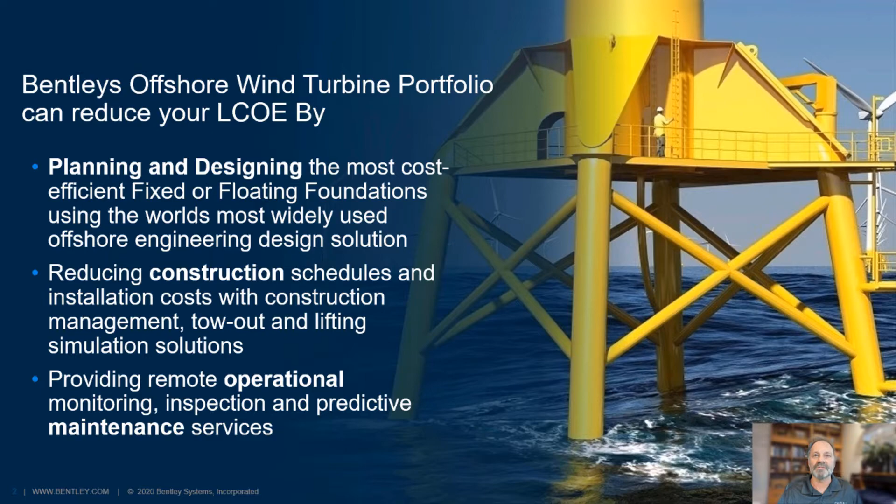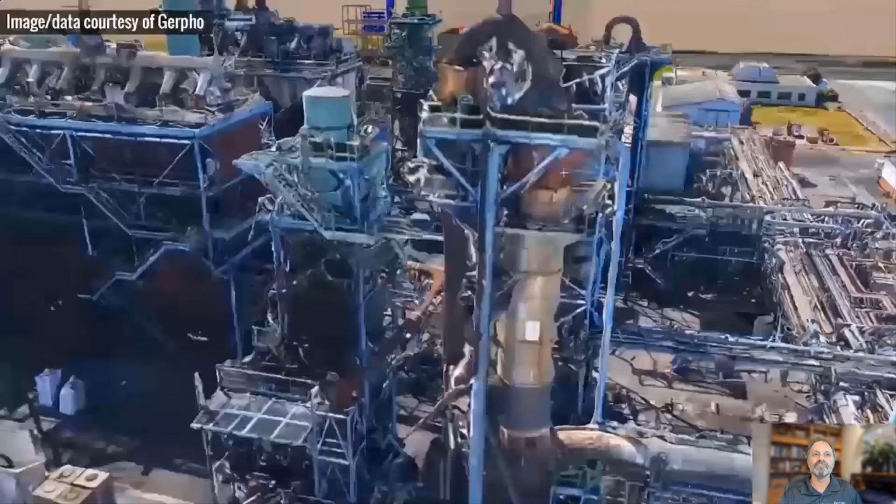So let's hear what is a digital twin. A digital twin is a digital representation of a physical asset, process, or system, as well as the engineering information that allows us to understand it, model it, and get its performance. Typically, digital twins can be synchronized from multiple sources, including sensors and continuous surveying, to represent its near real-time status. This synchronized data can be used to gain valuable insights, to more fully understand the physical asset.

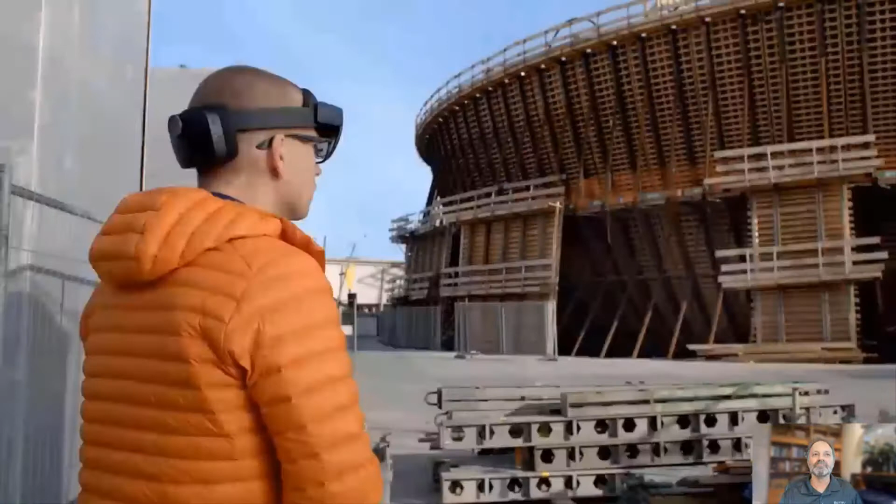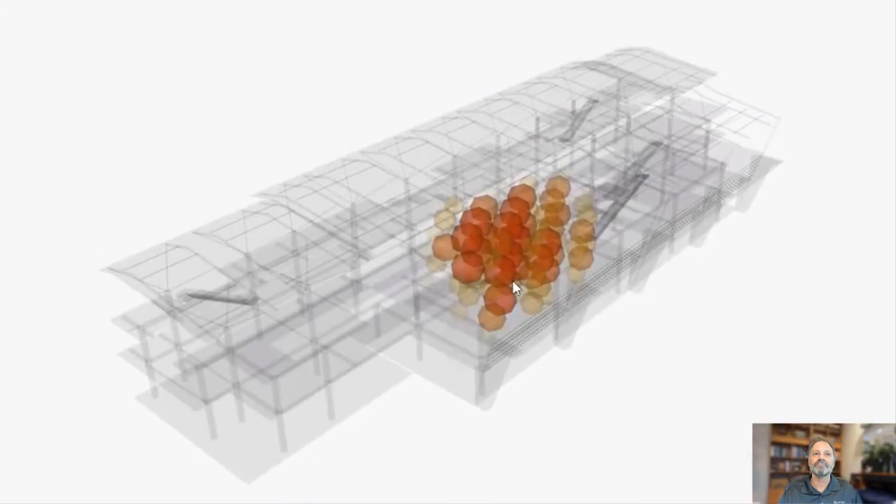Infrastructure digital twins, or iTwins, are emerging now because of a convergence of technologies that enable an immersive and holistic view of infrastructure. Now, these include 3D and 4D visualization, reality modeling, mixed reality, and geotechnical engineering. Bentley's goal is to enable a digital twin ecosystem that will improve our understanding and transform the performance of the world's infrastructure.

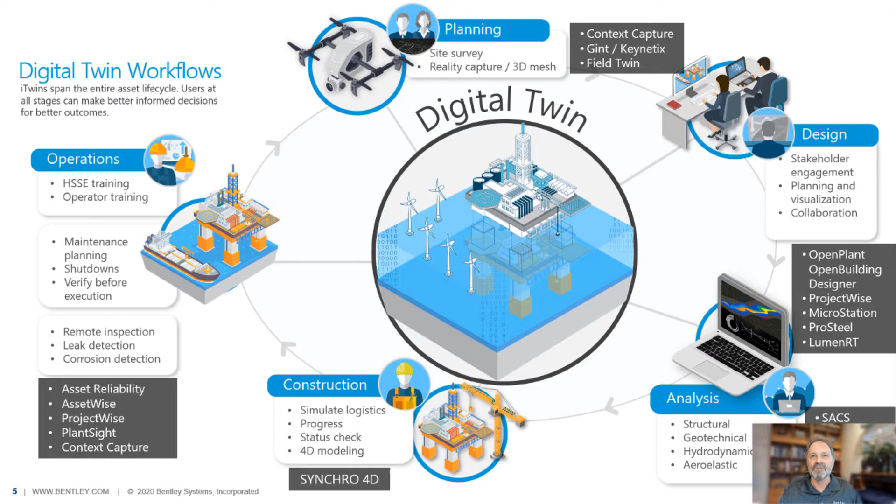And a digital twin for offshore wind farms should be comprehensive across the whole complete life cycle, as I mentioned, from planning to design to engineering analysis to construction simulation through to operations and maintenance, and even with asset performance and maintenance. So let's look at the planning phase.

Let's look at a unique tool called FieldAP and FieldTwin from Bentley's partner FutureOn. As an offshore wind planner, they typically want to combine the metocean data with the seabed depth profiles, the geotechnical soil conditions, and the various turbine equipment options. So different wind farm layouts can quickly compute suitable foundation sizes and project costs. And when the project moves from detailed planning, procurement, and construction phase, the field twin data can be connected to the Bentley iTwin platform. So let's look at this in action.

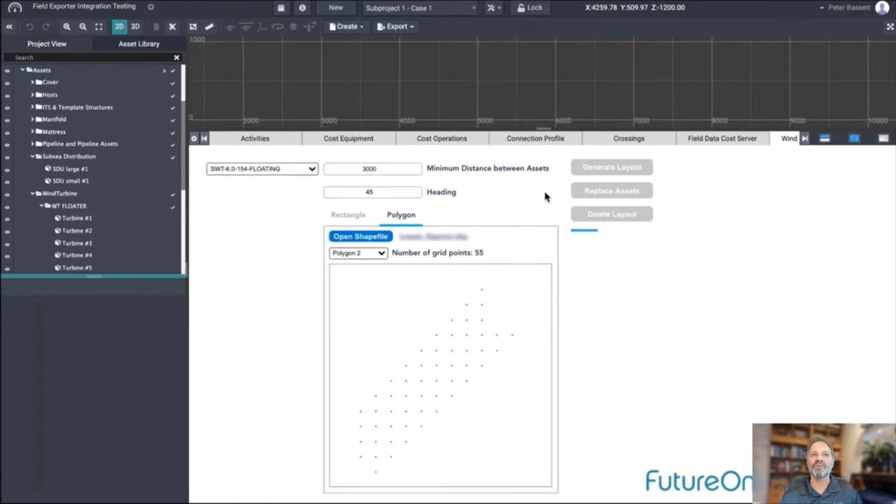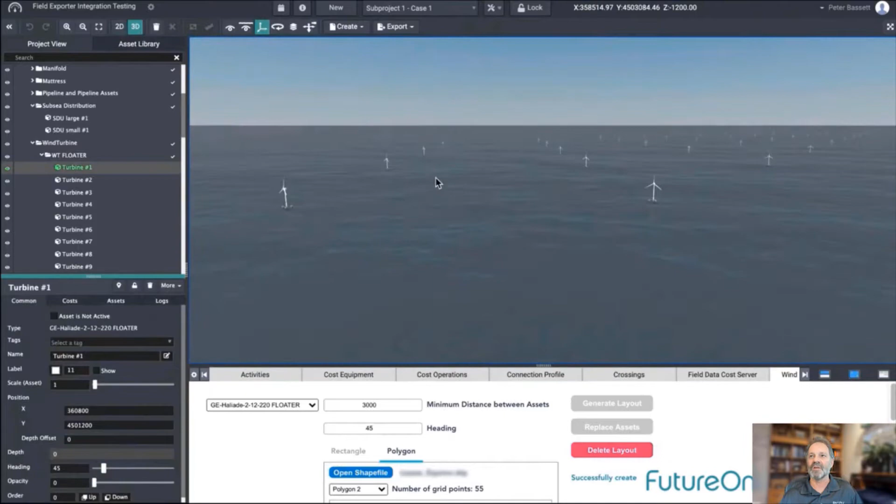FutureOn's FieldTwin Platform as a Service provides engineering and field staff a way to aggregate and visualize all the data critical to offshore wind projects. The proposed layouts can automatically be generated within the 3D model of the seabed depth profile for a clearer visual evaluation by developers and stakeholders. It is easy to design and compare various substation, turbine configurations, and cable routing, and the costs associated with each configuration, including accounting for existing assets like oil and gas drilling platforms which may be in the area.

So next is design. So how can we lower your design cost? Well, Zentech Engineering from South Korea designed this offshore wind turbine substructure. Bentley Offshore design approach enabled the project team to reduce the structural weight while maintaining sufficient structural capacity and strength given the wind and wave loading on it. The construction of the optimal design took 20% less time with Bentley's SACS application.

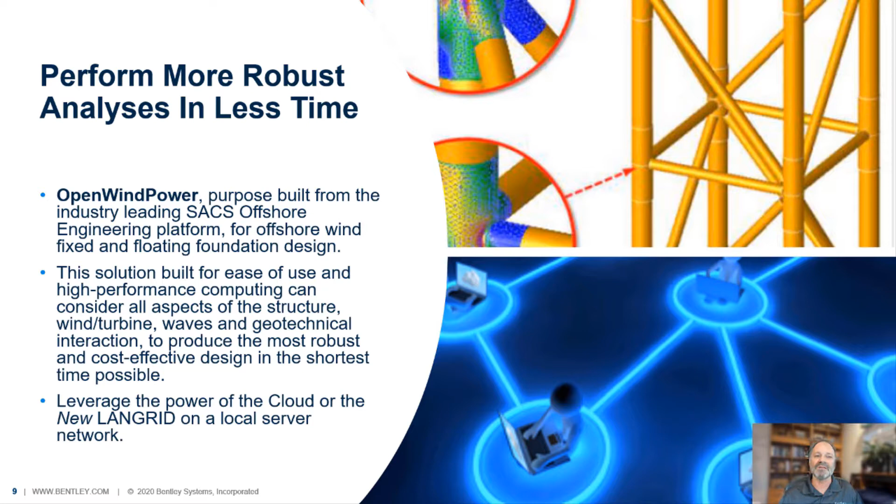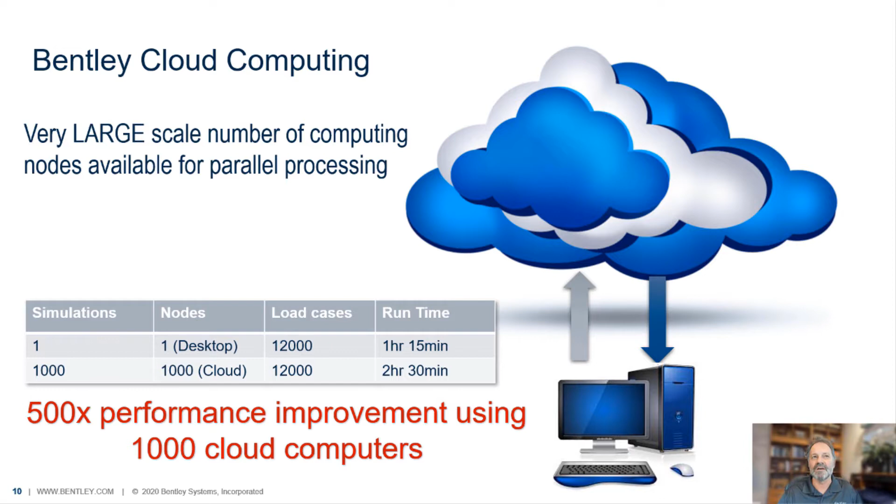And these high-performance computing options are available like cloud computing, and they allow for large-scale analysis. So you can explore many more design alternatives and produce a more optimal design. And similarly, we have another high-performance platform using a local area network grid. So let's take a look at some simulations here.

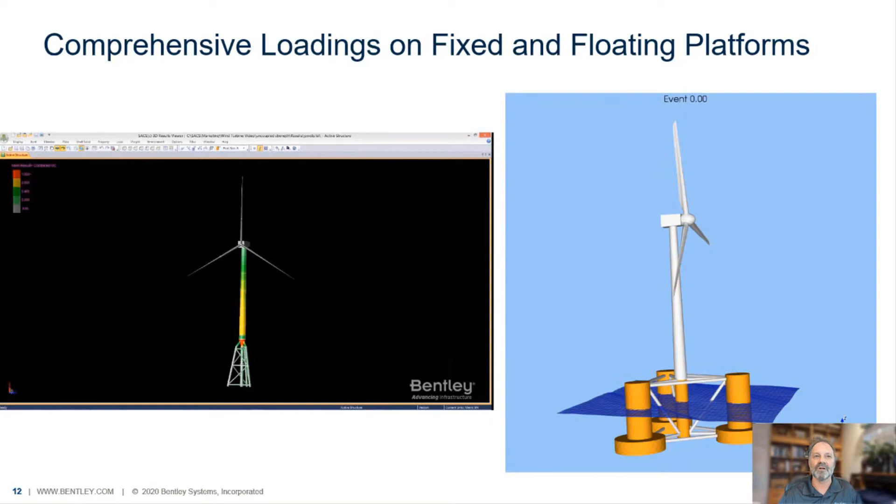So we can integrate coupled and uncoupled aeroelastic analyses and that captures the turbine vibration with the structure and the motion behavior of the fixed or the floating platform to deliver an accurate simulation under even extreme environmental conditions.

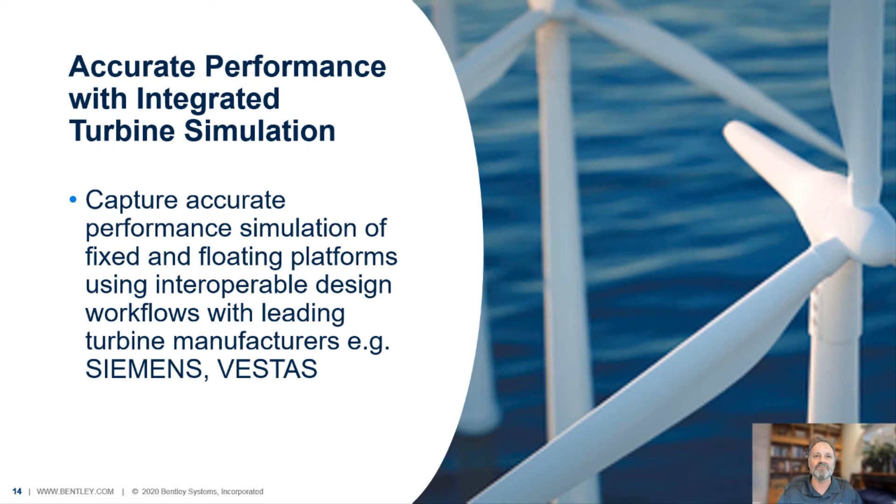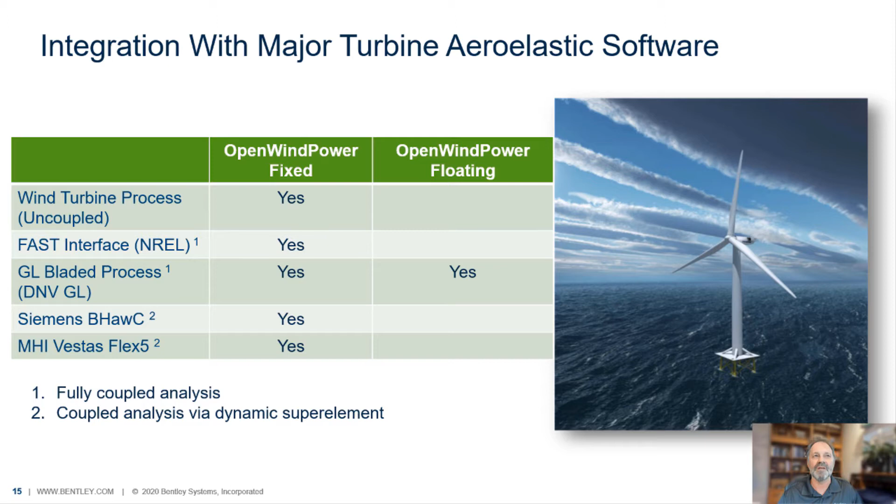But so who are the key wind turbine manufacturers in the offshore business? Well, you can recognize Siemens and MHI Vestas, but we also integrate with GL Bladed, FAST from NREL, and we even have an uncoupled turbine process as well.

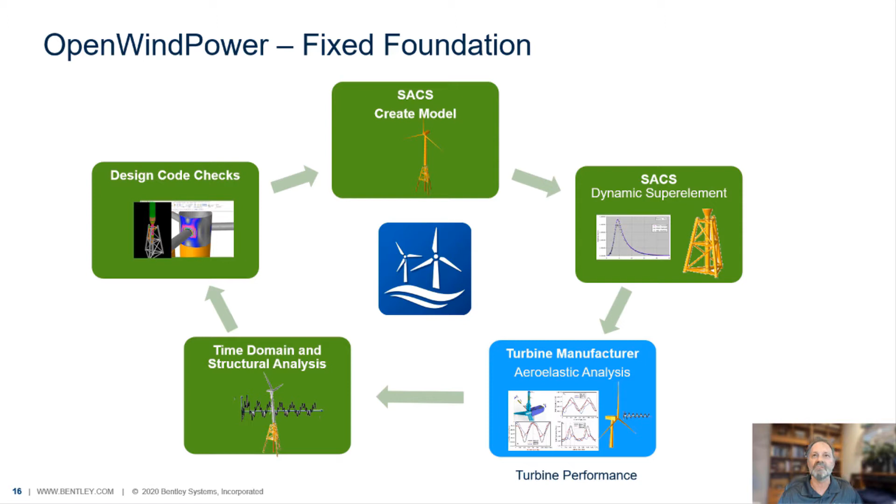We have two products. The first is OpenWindPower Fixed Foundation. It's been around for about 8 years now, and it can analyze and design jackets and monopiles to support those offshore wind turbines. And the second is OpenWindPower floating platform, you'll hear from shortly from Dr. Daniel Veen. And that was introduced end of last year. It's a single product to design end-to-end the floating platform, support those dynamic loadings that you just saw in the earlier animation.

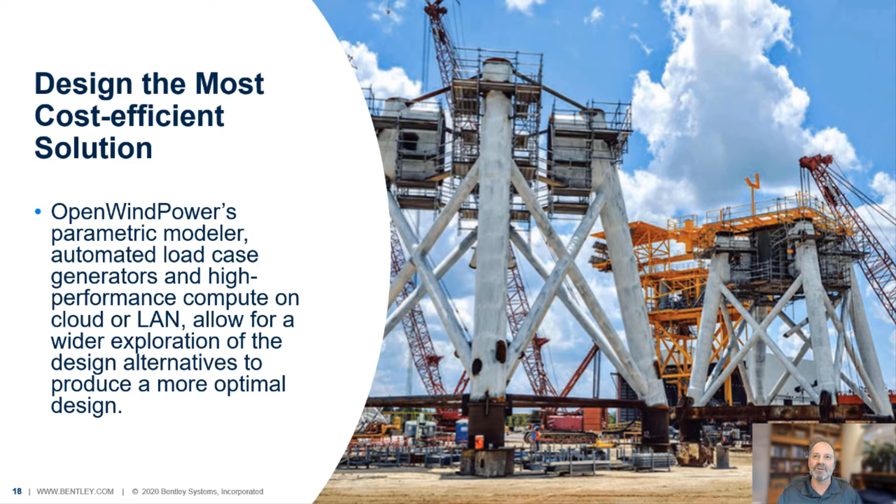Thanks to OpenWindPower, Keystone Engineering out of Louisiana were able to adapt a deep water jacket structure from the oil industry and significantly reduce the amount of steel required. And it resulted actually in an installed cost savings of 20% on the 30 megawatt Block Island project, which is near Rhode Island. They also shortened the design cycle by 50% compared to typical European offshore wind projects. We also are able to handle and manage thousands of load simulations that can be generated in minutes, and we can manage those in Microsoft Excel.

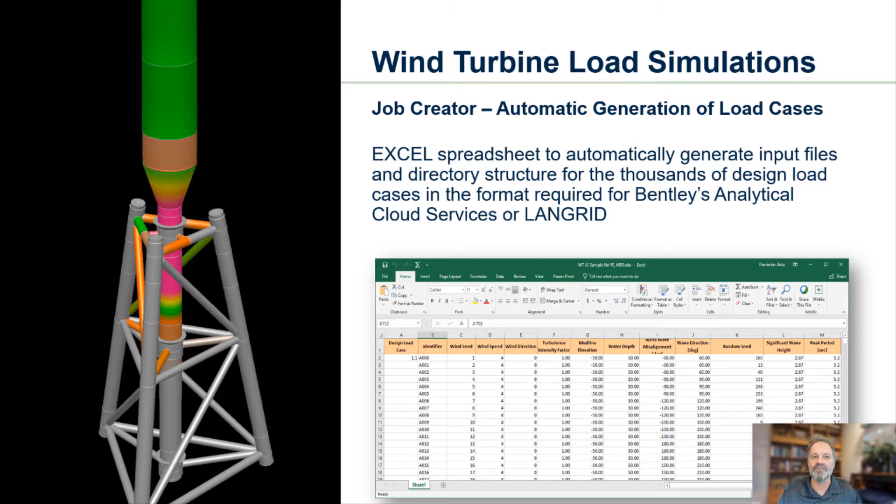Parametric modeling is a big time saver, and particularly modeling jacket structures. Companies like Hyundai Heavy Industry and PowerChina are able to reduce their design time by 20 to 30%. And even batch operations to complete multiple iterations of design and analysis to find the most optimal design solution.

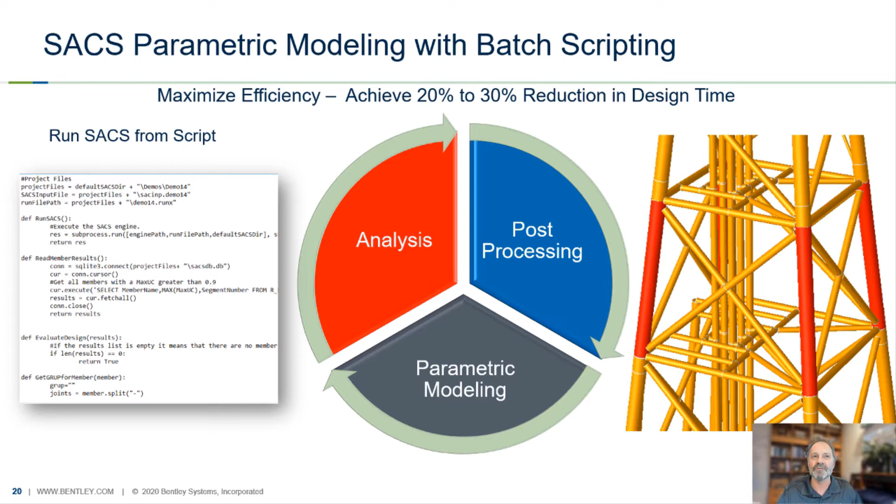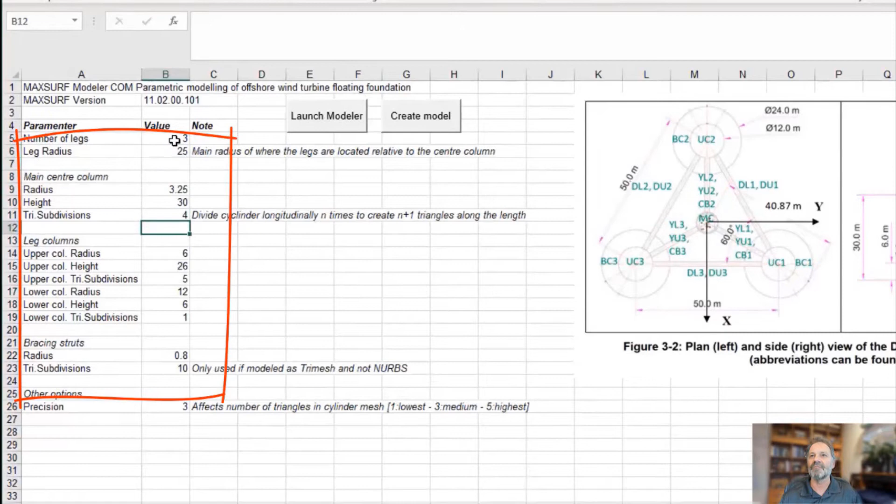So let's take a look at a similar example in our floating platform, OpenWindPower Floating. Here we see parametric modeling using Excel, and just entering a few dimensional parameters, we can very quickly change and generate a full parametric model in seconds for the full semi-submersible cylindrical platform.

For design review collaboration, we have a solution on the cloud using Bentley's iTwin that you saw earlier, and you're able to launch a design review session from inside the software, and any team member can be invited. Offline sessions are also available, and they're available to review, mark up, and share with the whole engineering team or even contractors.

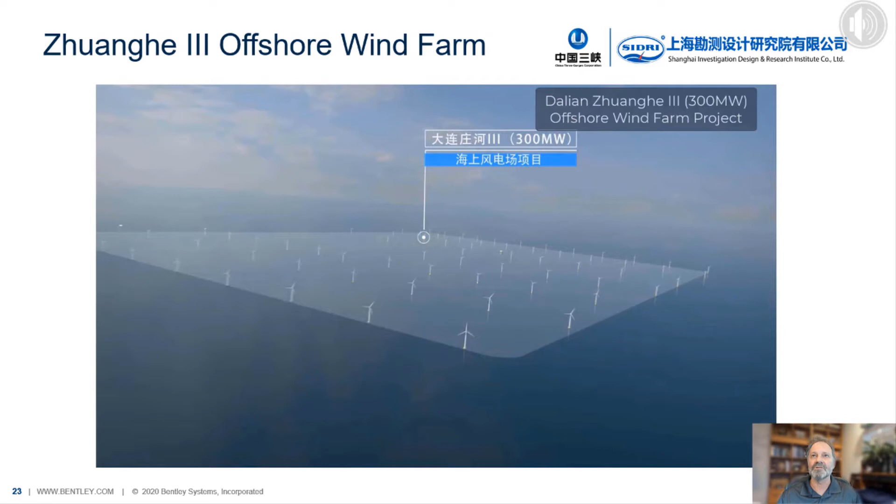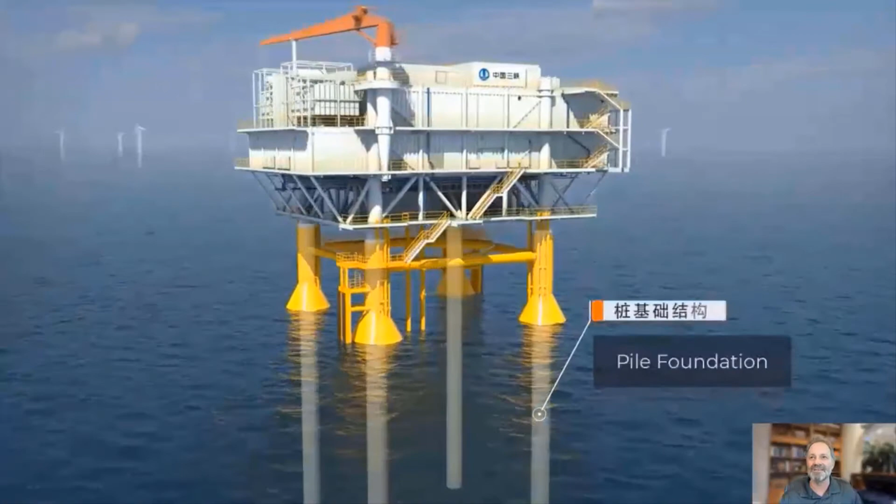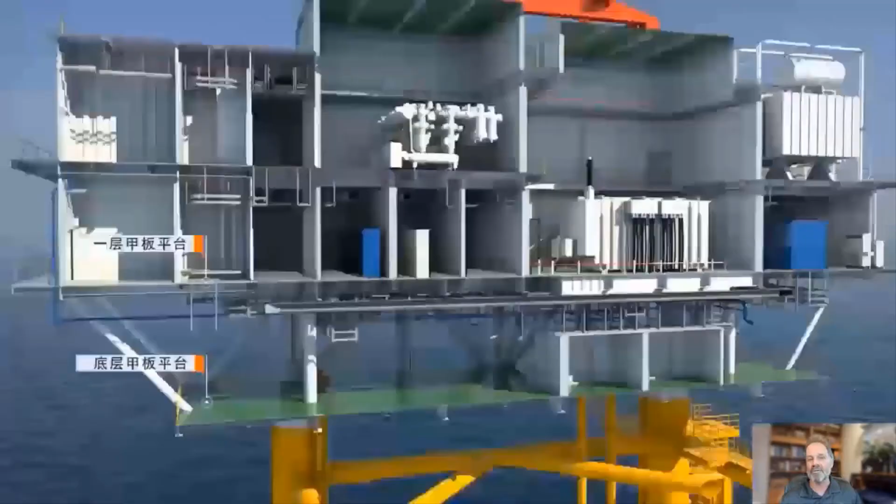One similar project that we had in China is a digital twin project in the Three Gorges region in China, designed by Shanghai Investigation Design and Research Institute. And this is China's very first anti-ice floe offshore wind project. It used special monopile foundations, and they modeled a detailed 3D substation model that you can see here, and using all the multiple simulation and design tools that we have, they're able to achieve a single intelligent digital twin model.

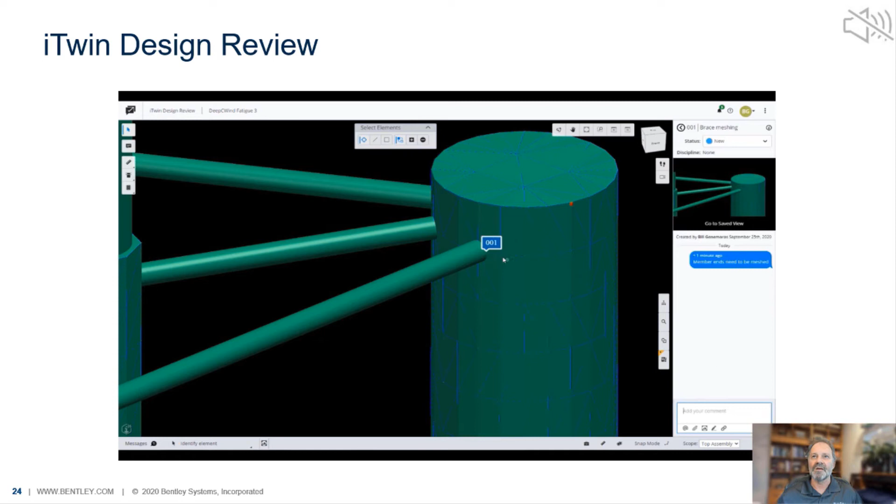So the design collaboration I just mentioned, where you can launch a session from inside the product, like in SACS, invite any team member to it, and the iTwin design review service launches in the cloud and on a browser, and with all those team members invited, you can review, mark up design issues, and even come back to them later. There's a complete design history as well.

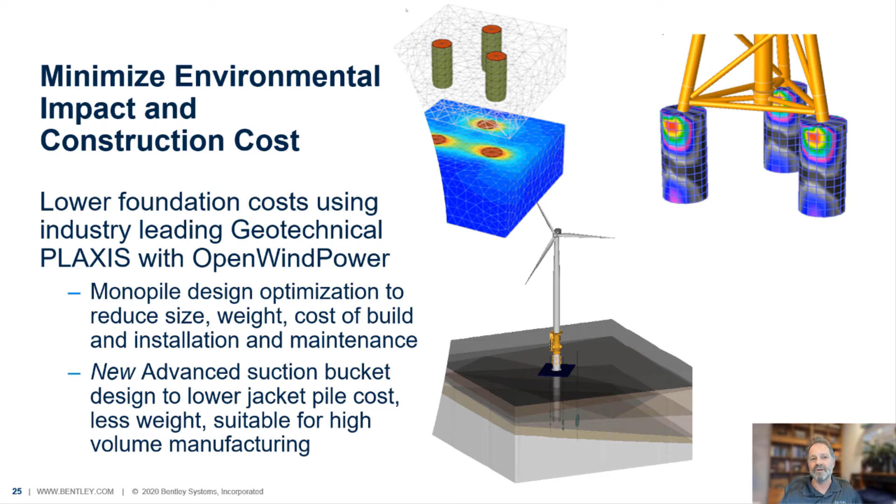About 2/3 of all offshore wind farms use monopiles. So what if you could reduce the size and weight, and therefore the cost and maintenance on these monopiles? And also, what if you could have greater confidence in using suction bucket foundations, which can provide big advantages of reuse, they're marine friendly, and they're also big savings on total capital cost as well, even up to 40%. So companies like Siemens Gamesa, for example, have been investigating mono buckets, and certainly a number of Chinese and Korean companies have started to use more suction bucket designs on jackets to achieve millions in savings.

And here you see a new suction pile design workflow that we're just about to release, where the complete SACS structural model is integrated back into PLAXIS 3D, and a detailed finite element soil analysis is performed, which includes the interaction between the multiple suction piles, and then the whole soil characteristic is updated in SACS, and the final structural analysis for fatigue design can be completed.

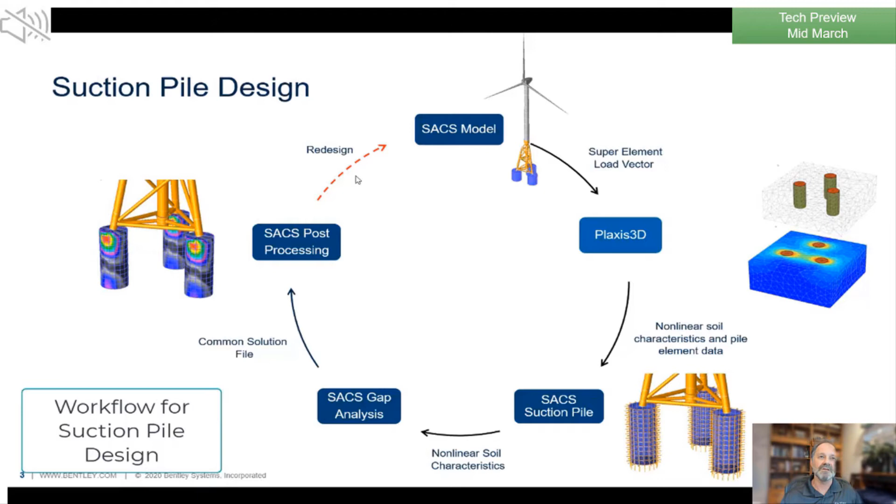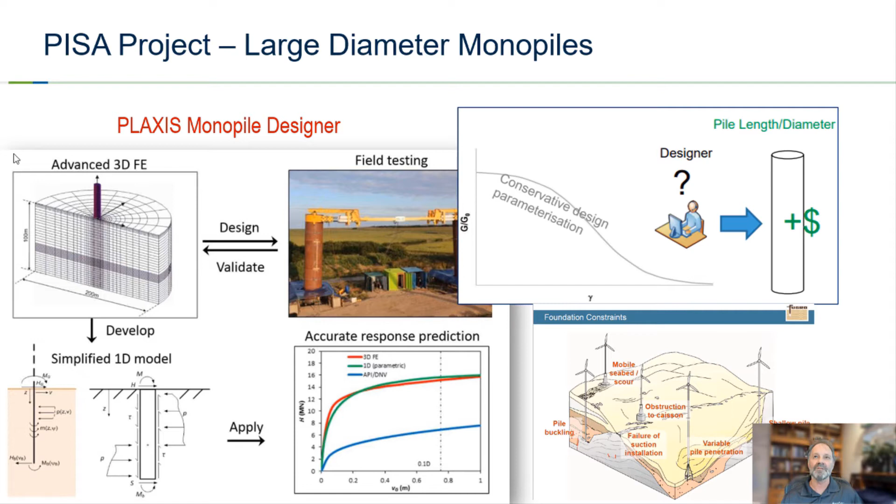Of course, like I mentioned, the monopiles are getting larger and larger, up to 15 meters in diameter and 100 meters long, and to be designed in deeper waters like up to 60 meters in depth. But very conservative design methods are still currently used, which result in very heavy, expensive monopiles that weigh up to 2,000 metric tons. So any solution to safely design monopiles and remove this conservatism is a win-win for the owner and the supply chain.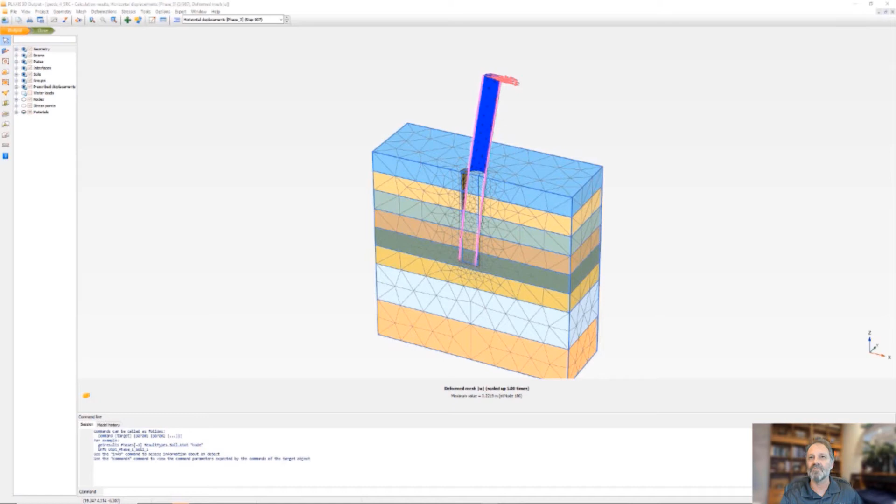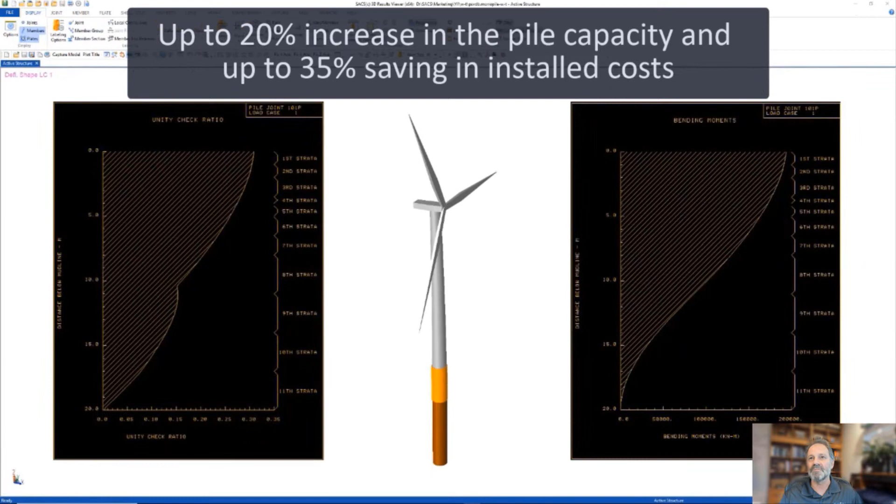So here in this video, we see the new SACS Plaxis monopile designer integration, where you can analyze the geotechnical behavior of your foundation for your monopile, either in a full 3D numerical approach or using a rule-based PISA design method in Plaxis monopile designer. The soil response curves obtained from this geotechnical analysis can then be automatically converted and read into SACS, and you can remove that conservatism I just talked about of up to 35% saving in installed cost.

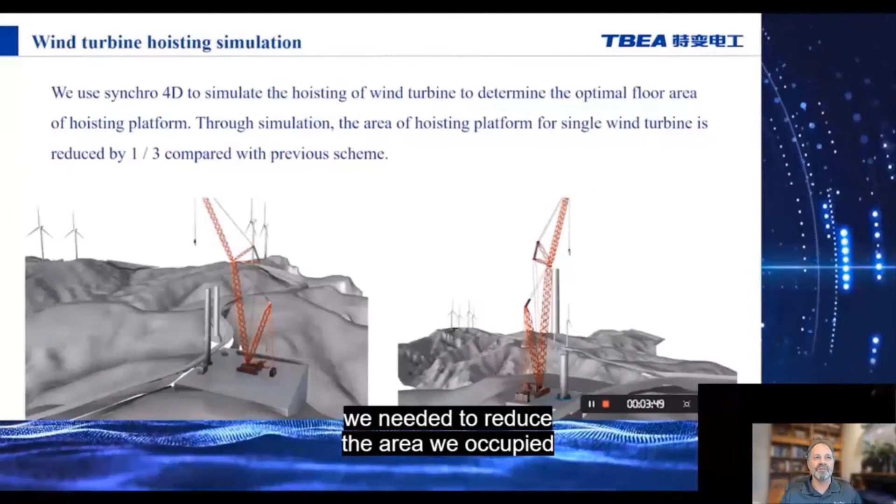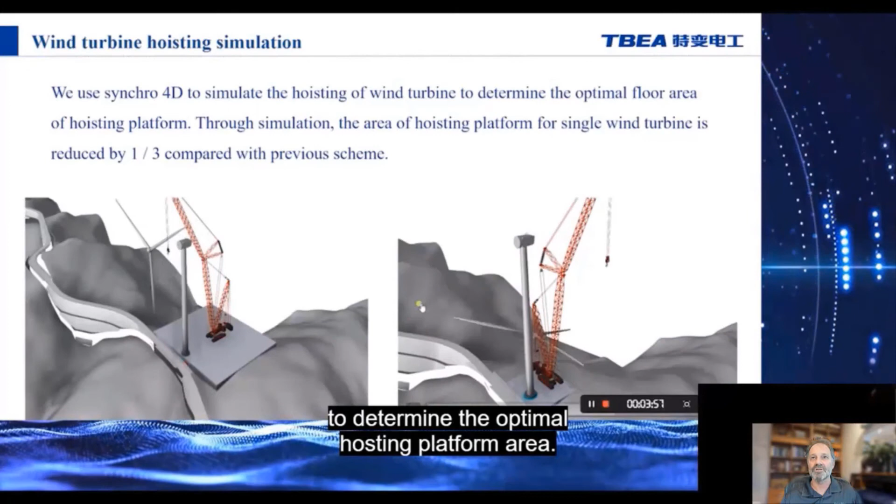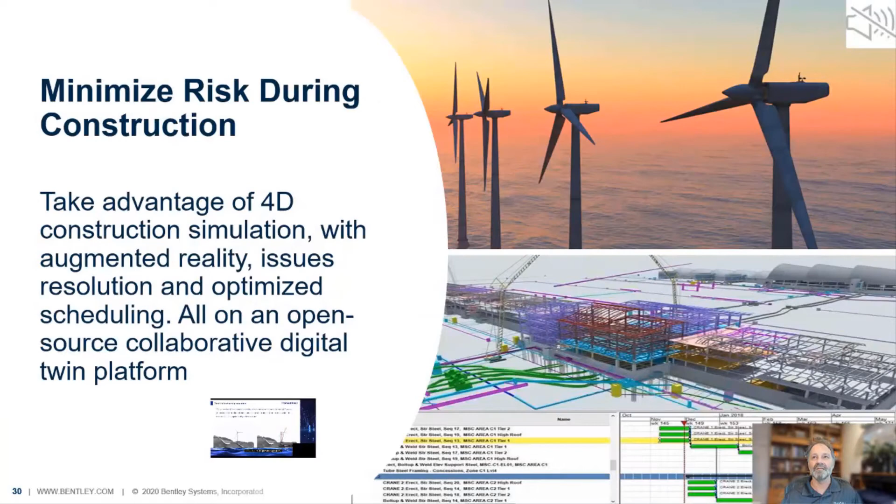So construction is another way where we can help you save cost and remove conservatism as well. Synchro 4D has resource management optimized scheduling to accelerate construction. Here you see an onshore wind farm where they're erecting an onshore wind turbine and simulating that, doing all the resource management, the time simulation to do that lift, and scheduling the whole process as well. And this reduces non-conformances and gives big gains in risk mitigation. And we can also do a similar complex simulation in transportation and lift, similar to what I showed earlier as well.

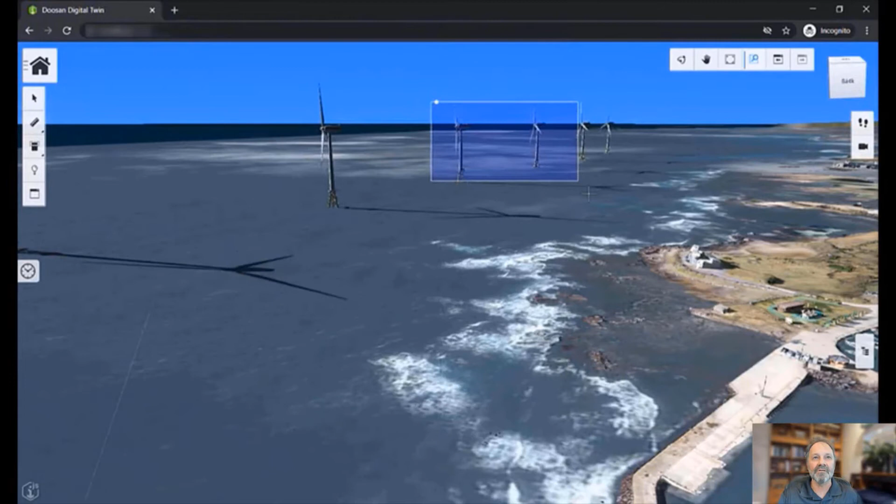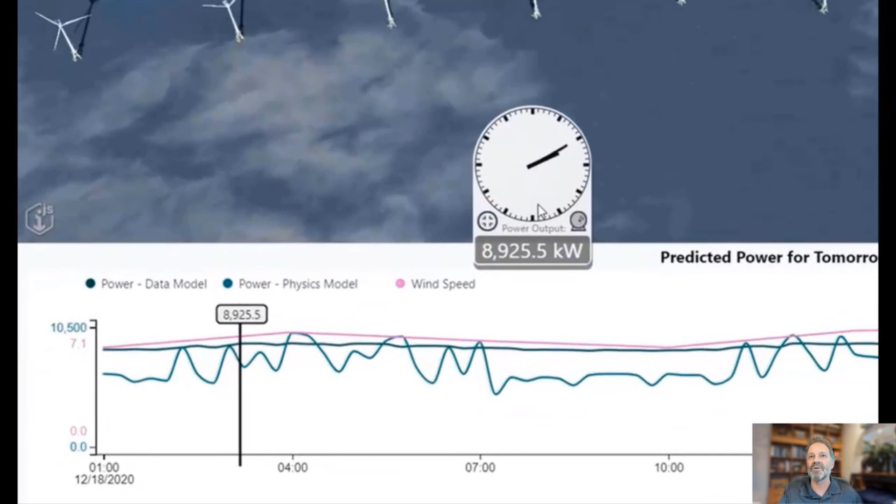So operations and maintenance: we have a new partnership with Microsoft and Doosan Heavy Industries. Here you see a project in South Korea. A 3D reality model was generated for the project using Bentley's ContextCapture. And out to the offshore here, you see the turbines, and the live power from any of these wind turbines can be viewed from IoT sensors linked together. The observed power and the design power can be seen in real time or across any time period. And the power and any component warnings can be displayed, and with the weather forecast data and AI, the digital twin can predict the power production.

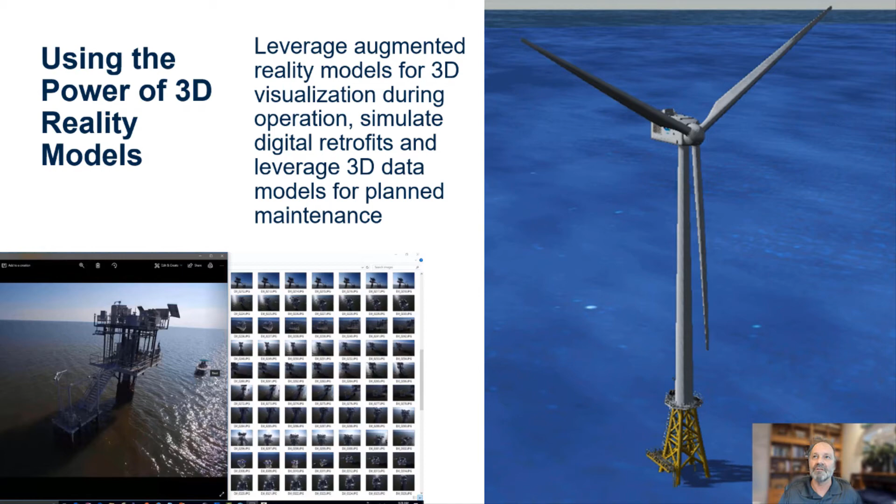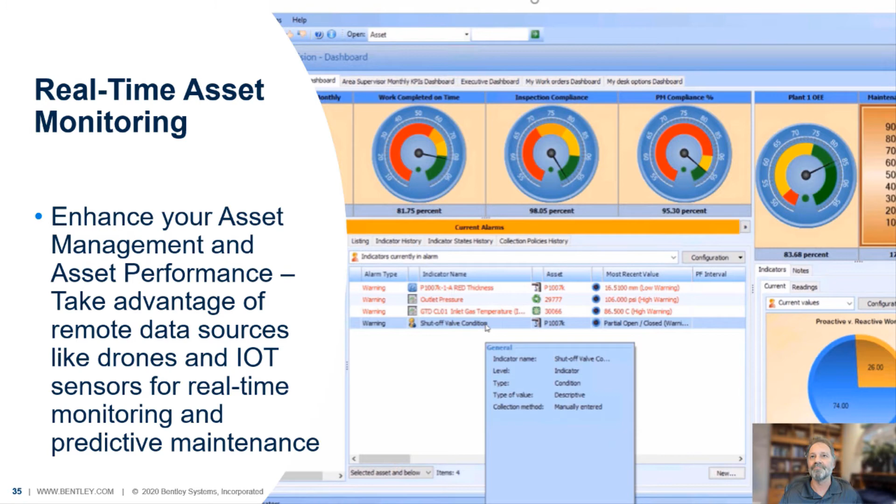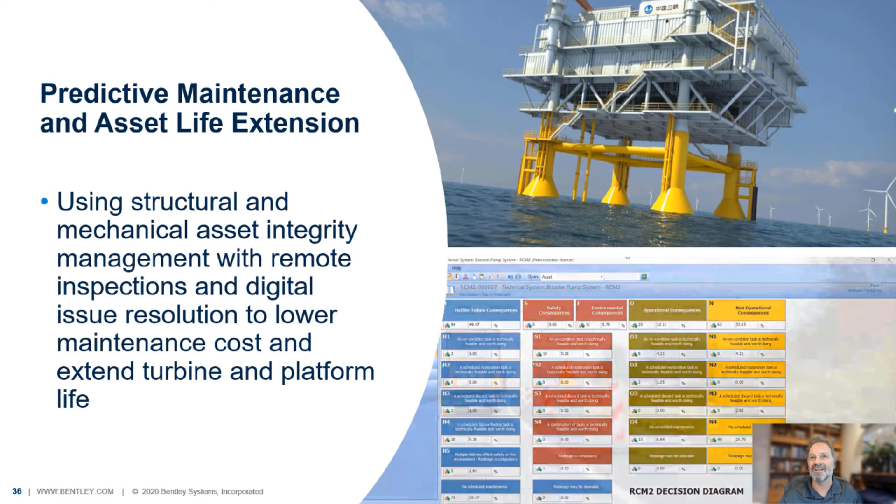And like I mentioned, we can generate any high definition 3D reality model using photogrammetry, drone flyover with high resolution photos. There is our real-time asset monitoring, so we can monitor with that sensor data to track turbine blade erosion performance, gearbox vibration, or platform corrosion and movement, all integrated into one digital twin model to give real-time historical reports. And then lastly, as I mentioned, operational costs can run up to 40% of the total cost of the offshore wind farm. So using some structural and mechanical integrity management, we can reduce the maintenance cost and extend the life of the turbine and platform as well. So those three areas: designing, construction, and operations and maintenance.

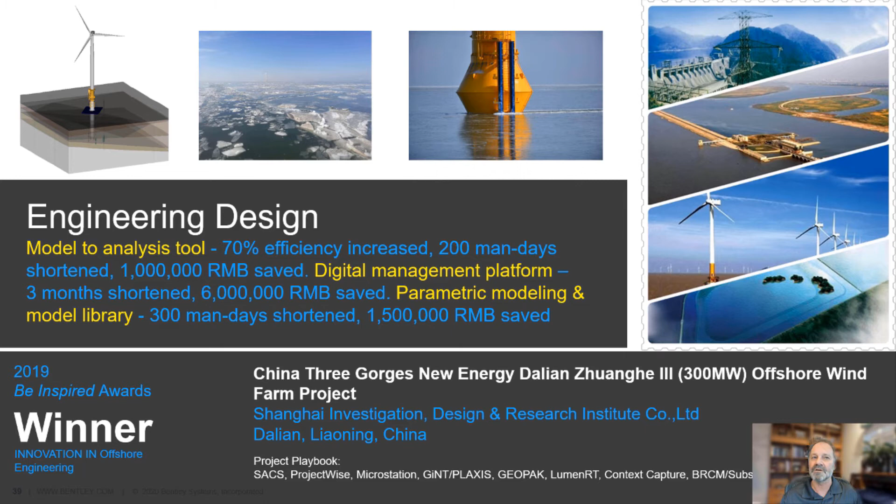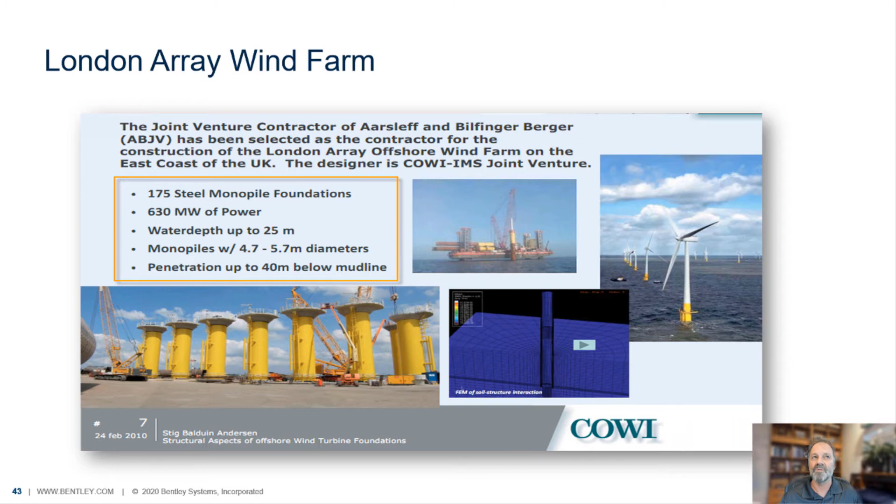Lastly, I just want to highlight a couple of projects here. Here's the Three Gorges project I just mentioned, with up to 70% efficiency gains, and they saved a combined 500 man days on the project. Here's a project in the Netherlands where MOSES was used to reduce the amount of steel on the platform. The London Array in 2013 was designed with SACS by a company called COWI. And an asset management project in the Netherlands predicts that using asset management can be a total cost saving of 4.3 million over a 20-year lifetime. So I'm going to hand it over to my colleague, Dr. Daniel Veen, now to show you the advanced modeling and design of floating offshore platforms.

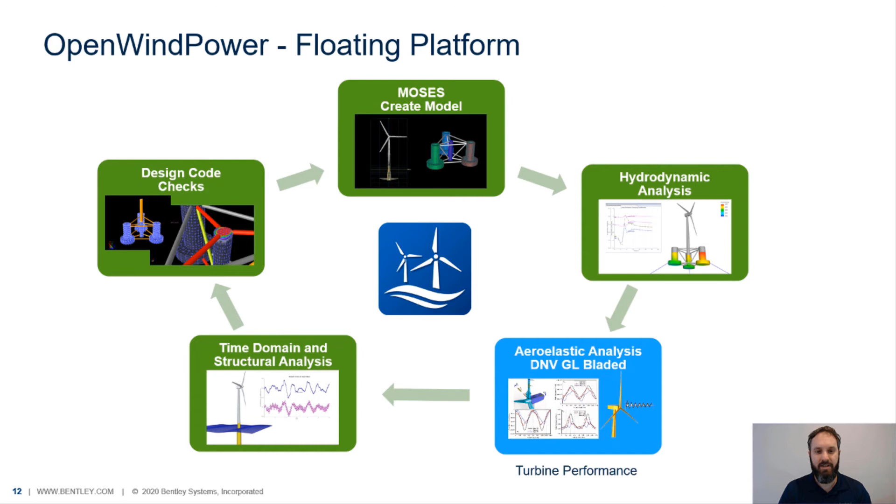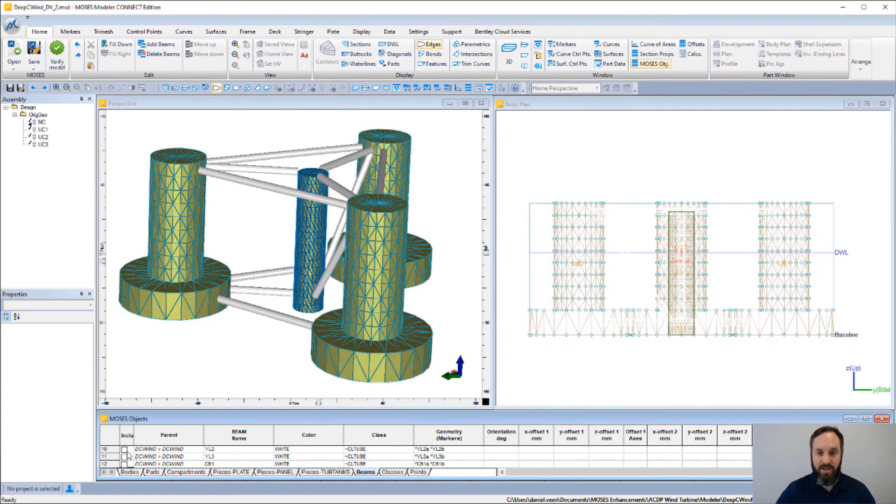Thanks, Mark. The OpenWindPower floating platform workflow comprises five elements: modeling, hydrodynamic analysis, aeroelastic analysis, time domain analysis, and structural code checking. The MOSES modeler generates three-dimensional hydrodynamic and structural models of floating platforms. Using the inbuilt meshing tools, I can easily create a tri-mesh to define the hydrodynamic surfaces of the DeepCWind floating platform. I can then define the linking structural beams directly through a dedicated MOSES objects window. I can also import geometry from a range of file formats. Here I am importing a polymesh of a 5 megawatt turbine and tower for illustrative purposes. Once complete, this model can be saved in the native MOSES format, ready for export to the MOSES solver.

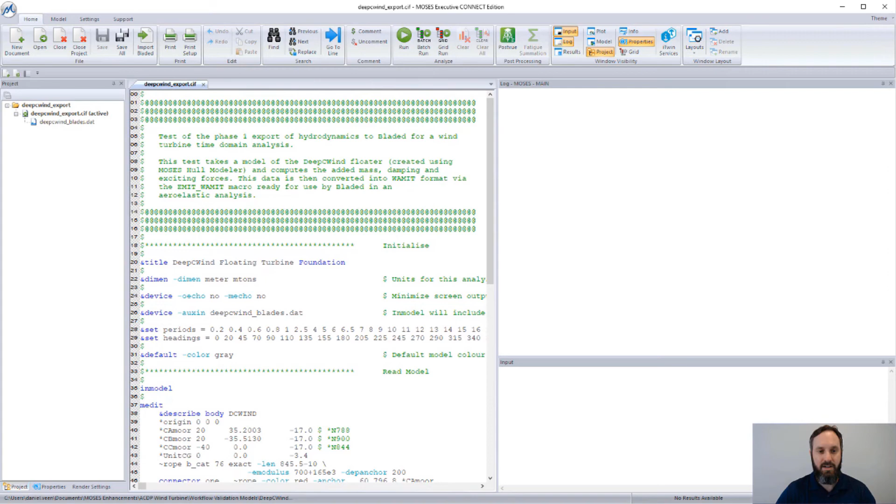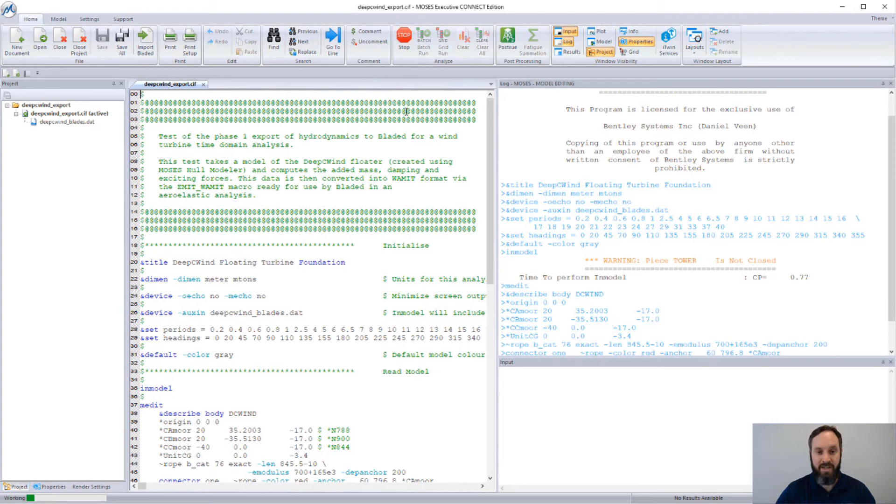I'll now import the model into the Moses executive. Here I've created a command input file that controls the Moses analysis. The model is ready to run, so I'll move to the ribbon and select the Run button to begin processing. Moses will locate the model in the desired location, compute its weight at this position, and then perform an equilibrium calculation to ensure the net forces on the body are 0.

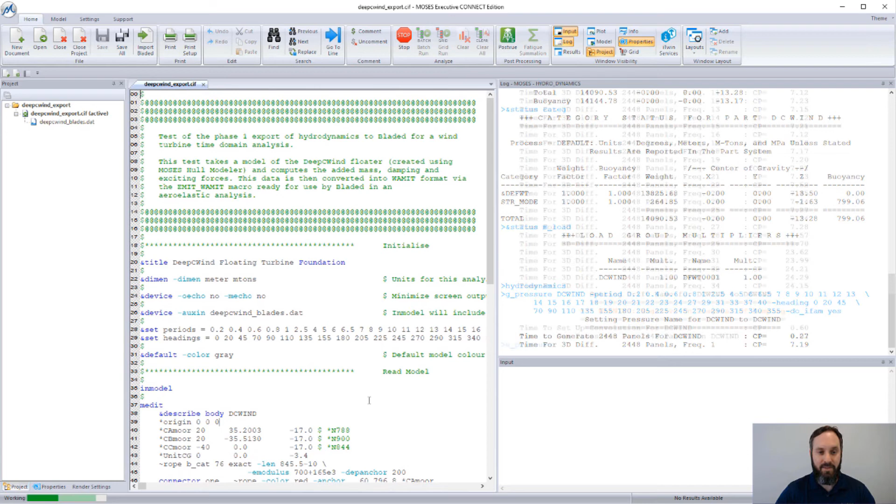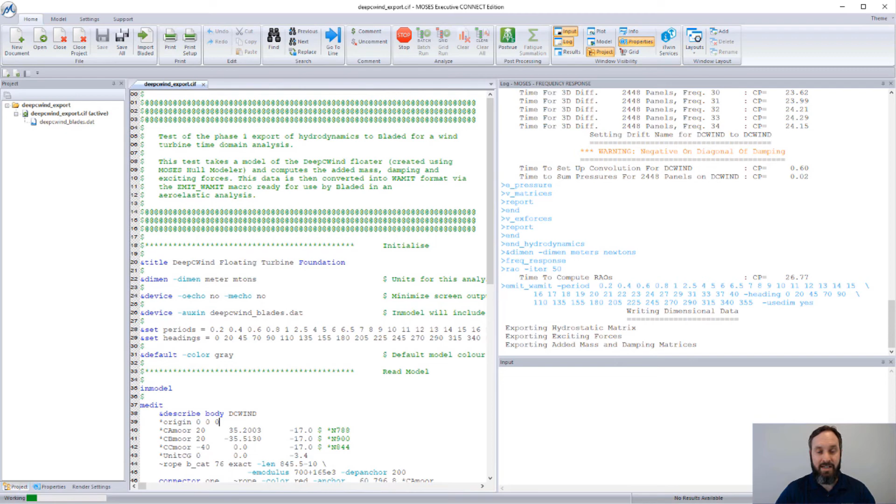Moses will then compute the hydrodynamic database of the floating platform. It takes approximately 7 seconds to compute the hydrodynamics for each defined wave period, so I'll move to the next phase of the analysis for brevity. Here I'll compute the RAOs and then make use of the emit WAMIT command to export the hydrodynamic data in the WAMIT file format. This data can then be used by any aeroelastic solver that is capable of reading WAMIT format files. I can view the results graphically by moving to the results layout.

On the right hand side is the model created using Modeler. I can display the wave pressure at any heading and frequency combination. I can also plot any data created during the analysis. For example, I plotted the added mass and damping of the DeepCWind floating platform here.

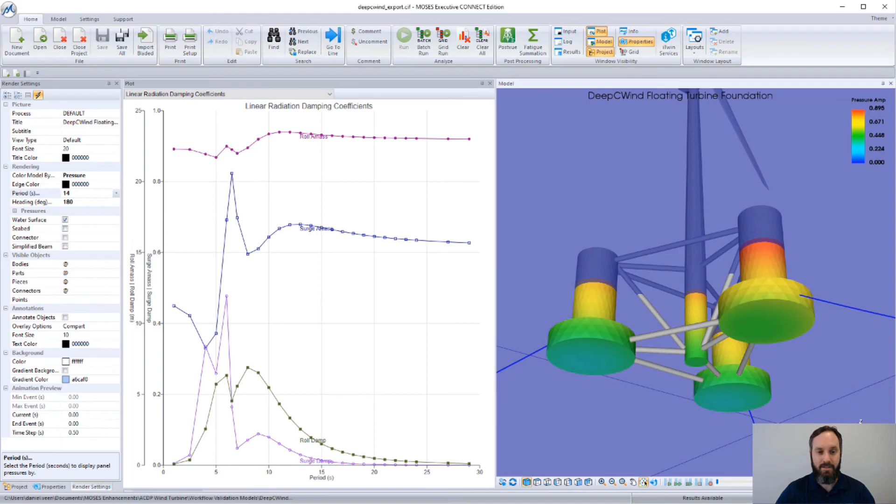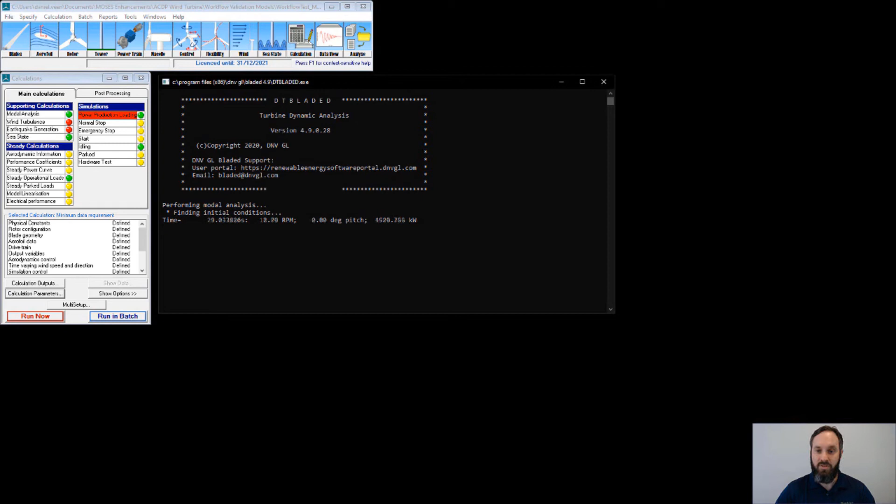The WAMIT format results, exported by Moses, can be read by third-party aeroelastic solvers such as DNV GL's Bladed. Here, Bladed is used to compute a power production analysis. The loads computed on the wind turbine are combined with the hydrodynamic forces to determine the trajectory of the body. These trajectories can then be exported along with the forces at key points, mooring, tower, for example, and the components that govern the wave environment, ready for inclusion in a Moses time domain analysis. I can also review the results of the power production analysis in graphical form and determine the overall performance of the wind turbine.

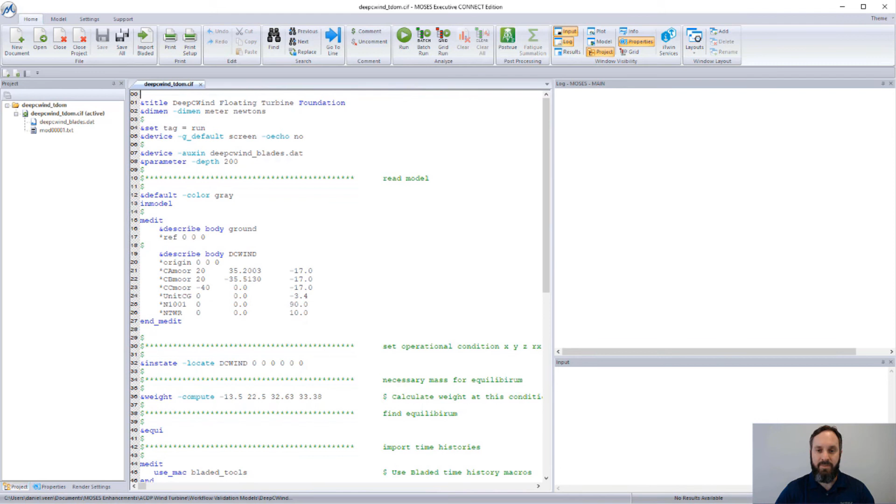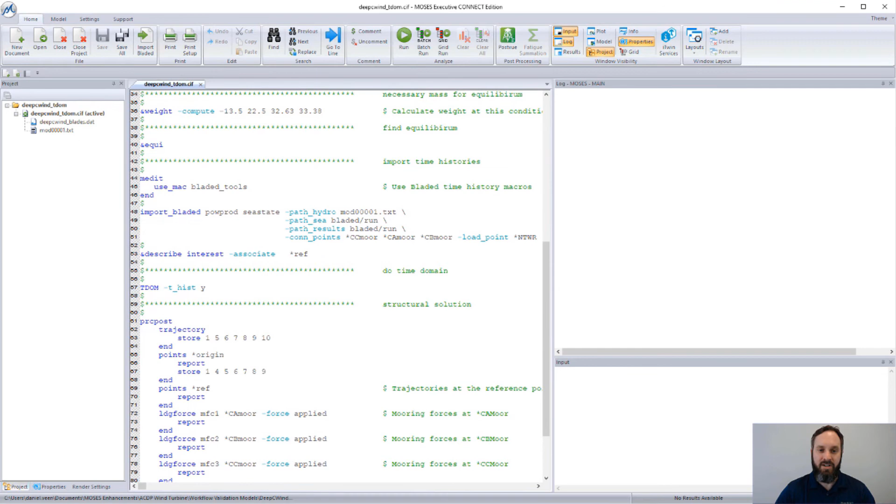Back in Moses, I have created a separate command input file for the time domain analysis. This analysis still references the same DeepCWind model as used in the export phase. Here I have 2 options. First, I can run a single analysis by referencing a specific Bladed simulation. I can define the location of the Bladed results in seastate folders and the Moses nodes at which to apply mooring and tower forces. Alternatively, if I have completed a number of Bladed simulations, I can use the import Bladed job creator to create multiple Moses command input files automatically. Moses will find all Bladed runs in a given folder and create a command input file for each run based on the active Moses template.

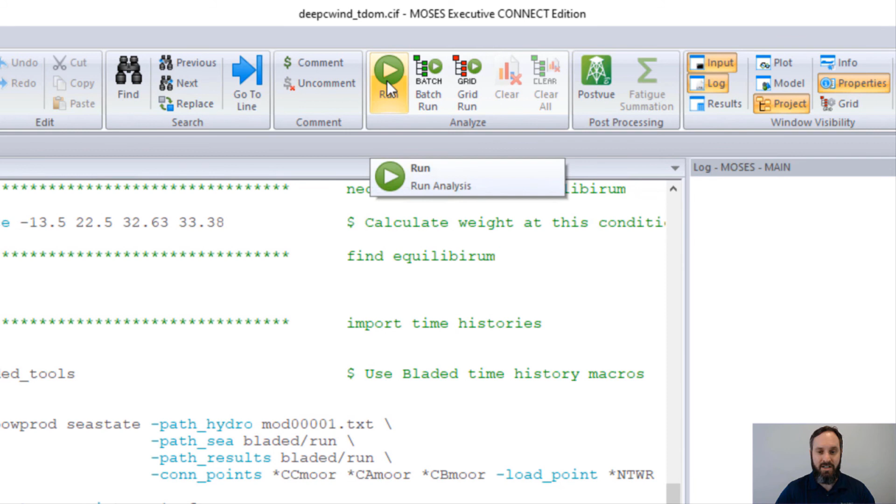In the ribbon, I have a choice of running a single file, running all files sequentially in a batch, or running all files concurrently via a distributed network grid. This will use all available cores on my machine and any available cores on the local area network. Bladed can create thousands of simulations, so the grid analysis service reduces error and offers a significant time saving. For this example, I only want to run a single analysis, so I'll just click the Run button.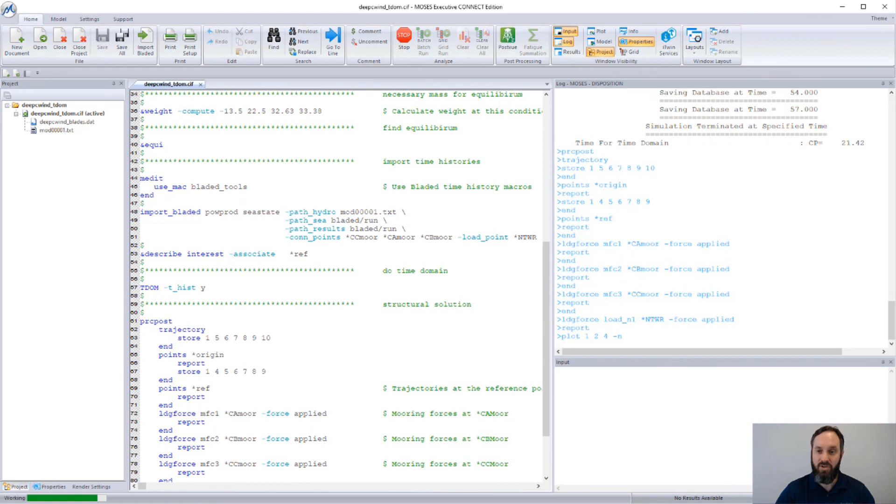Moses will begin to process the log file. The results from Bladed are imported, converted to Moses format, and then the time domain analysis begins. This simulation will build on the trajectories and forces from Bladed by including sea pressures and inertial loading. When the analysis is complete, I can move to the results layout to review the final data. On the right is the DeepCWind floater in the wave environment. On the left are results for wave elevation, the blue curve, and the X position of the body origin in global coordinates, the purple curve. Using the built-in data handling tools, it is very easy to compare these results with those produced by Bladed.

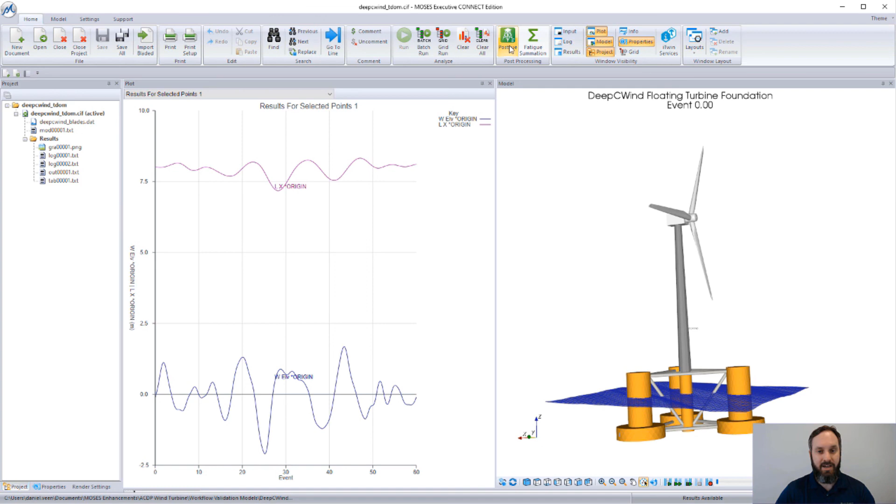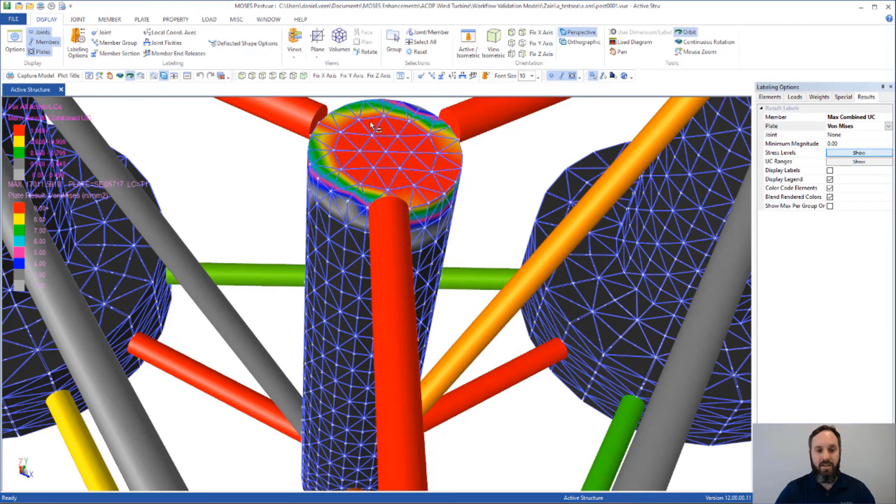At the conclusion of the time domain analysis, the calculated loads can be used to perform a structural analysis in Moses. The produced structural data is saved to a common solution file for code checking using SACS via an API SDK. The SACS post and fatigue modules can be run automatically and the results viewed graphically in Postvue. Here I have the structural model of the DeepCWind floater. I can view the stresses on both beams and plates and check against a wide variety of codes. If any of the structure fails the code check, the structure can be redesigned and the entire workflow repeated. That completes the OpenWindPower Floating Platform workflow demonstration.